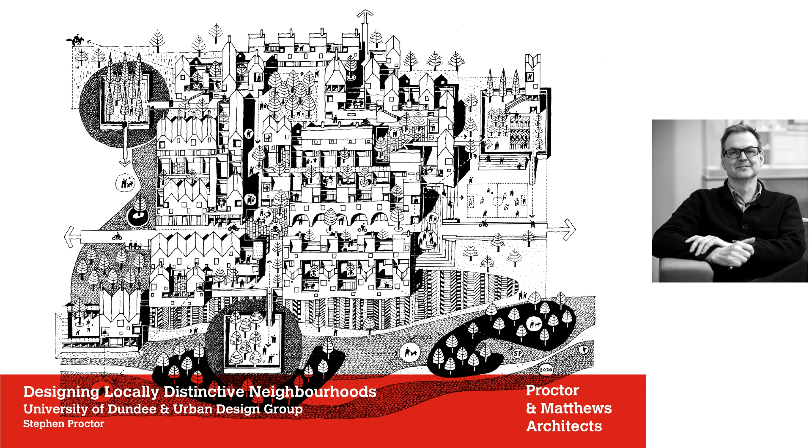I can't forward the slide.

And that got me thinking about what it is we do to actually make people really appreciate the communities that they live in, and how they feel that there is a strong identity and a sense of belonging. And a lot of the research that went into that particular project, which I'm going to talk about in a little while, Abode at Great Kneighton, is embodied in some of these documents that we published as a studio over the last few years, exploring a lot of the things I want to talk about today. And those can all be accessed on the Proctor Matthews website there.

So as a starting point, I think it was useful to go back to these two quotes. One from Gordon Cullen in '74, that he wrote as part of a study for a new settlement to the south of Aberdeen called Maryculter. And he said there that people live in houses, but where do houses live? If they are homeless, then all we are left with is the typical endless, featureless suburbia.

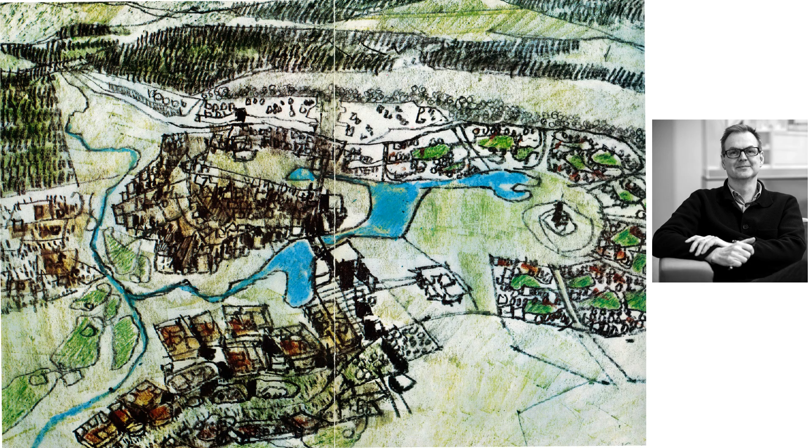And I suppose that leads on to this idea of security and enclosure and safety. It leads on to this idea of the boundaries of settlements. And to us, boundaries of settlements are one of the key ways in which we can define identity. And that doesn't necessarily mean separate settlements sitting in open green fields. It could also be the idea of different quarters within a city, how you cross a threshold, a boundary into a new quarter, so that identity is expressed in that way.

And this quote from Hisham Matar, the Pulitzer Prize-winning author, about Siena, is really important, I think. This idea that walls aren't just protective, they actually help us to define what we are ourselves. They define a territory. And that to us leads on to this idea that edges, boundaries, and thresholds are probably one of the first narratives that we always investigate when we're trying to create new neighbourhoods.

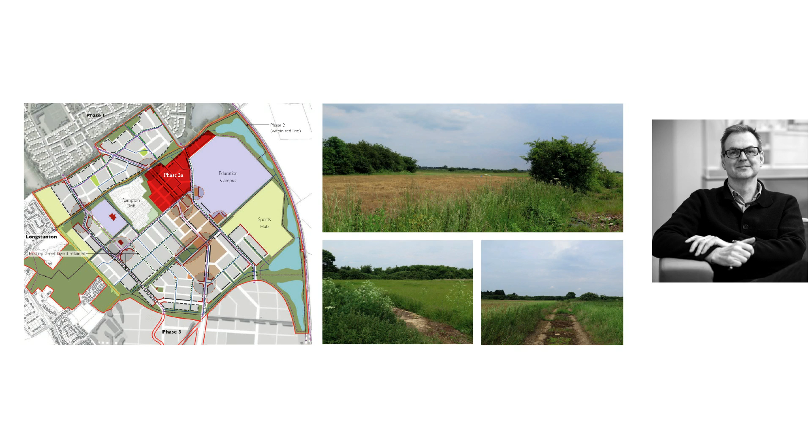So I wanted to start by talking about a project we just finished for Homes England in Northstowe. It's to the north of Cambridge. I think eventually this will be a new town of about 10,000 new homes. And we were looking at the first phase, really, of just over 440 new homes.

One of the key considerations here, as you can see on this slide, is that it's surrounded really by landscape on most of its sides. This is an education campus here, so this is buildings sitting in landscape, and then above on the edge here and on this northern edge. And so we started to think, well, what would it be like living in this first phase in this landscape? How do you create that sense of identity?

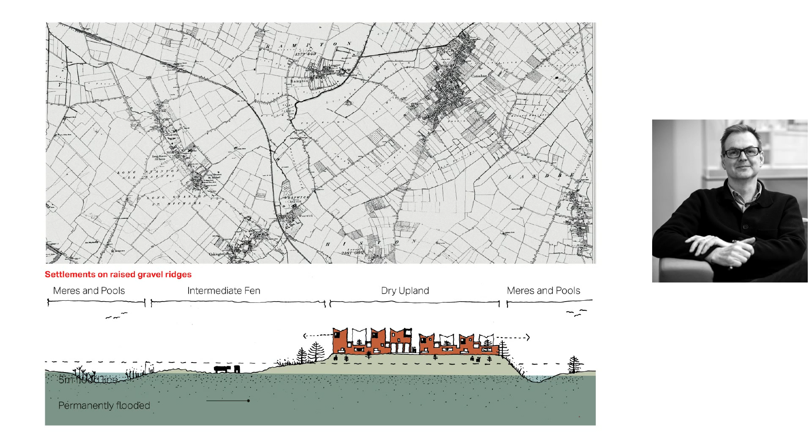And so we started to think about other fenland settlements here, and this is really, it's not very clear, this slide, but all those settlements within those sort of field patterns were originally settlements within marshland. And the little cartoon at the bottom suggests that all those were on high gravel beds that just were above the floodplain. And so they were very clearly defined settlements.

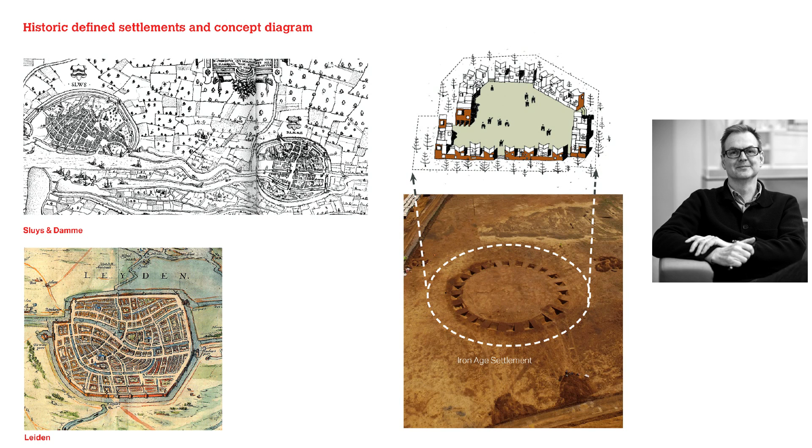or within a sort of marshland landscape. And so there are a lot of the historic plans there of the Low Countries and those defined settlements, defensive in this case, but settlements sitting within a wider landscape. And the cartoon on the right was the beginning of our suggestion that maybe our proposal for Northstowe should be a defined edge, something with a very strong edge, where you step into the realm of the neighbourhood and step out into this wild landscape.

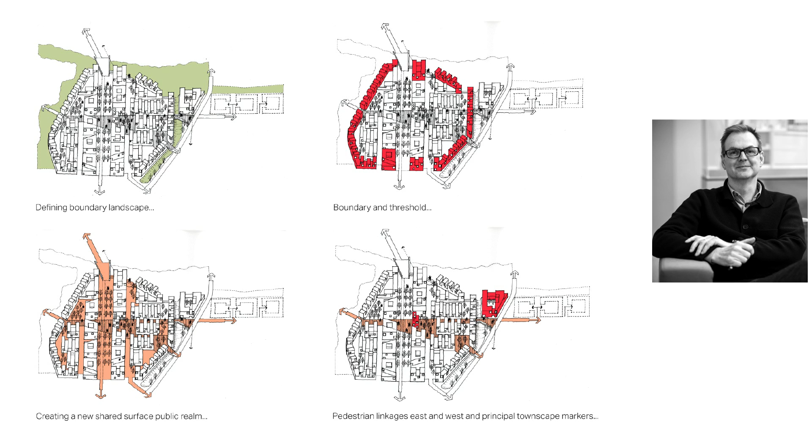And a few more diagrams there of how that strong edge maybe defines the patterns of landscape within those edges. And eventually a little cartoon. And then, of course, it became a real project. Unfortunately, it's not gone the best of ways. We built part of it, and then we had a developer that went into liquidation, I'm afraid. But so we built part of this.

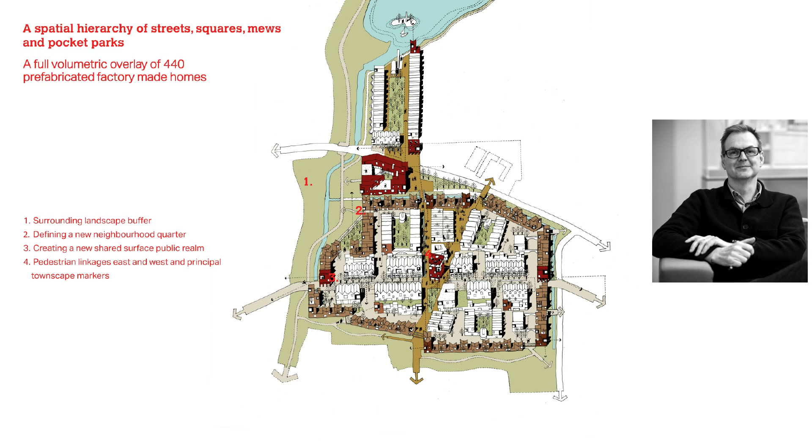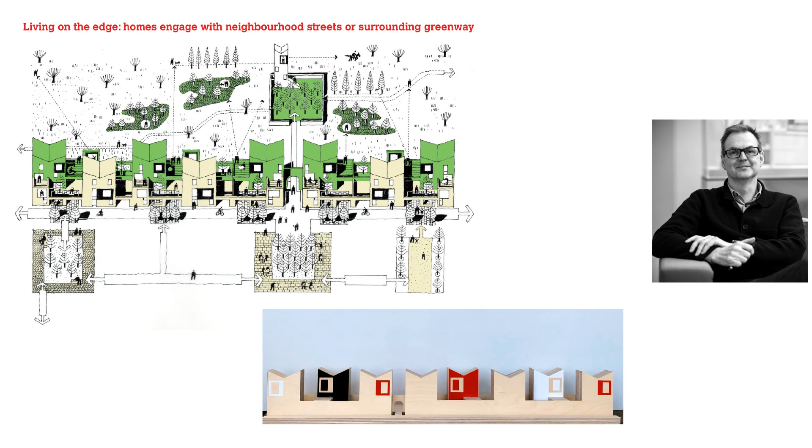Either you sit within the settlement, these houses here, and you face into the inner world of the settlement, or the greenhouses on the edge. So you're either an introvert or an extrovert. And just to show that these were thought through in terms of their planning and how each house typology helped to create that strong defined edge. And there we have the final proposal.

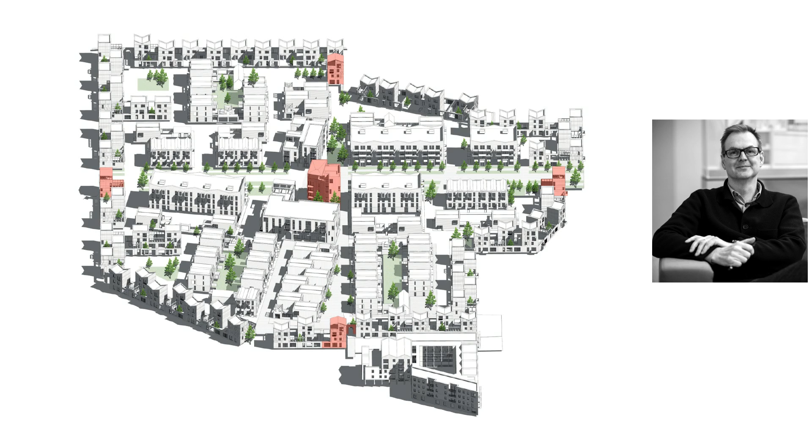The next project is a more recent project. It's for an estate. It's a historic estate that was built in the 19th century by an industrialist called Corbett, and he engaged a French architect to design this little chateau for his future wife. It's in the sort of Louis XIII style, and it has a very sort of formal relationship to the sort of parterre of gardens, these raised terraces in front of the house, and then this designed landscape around it.

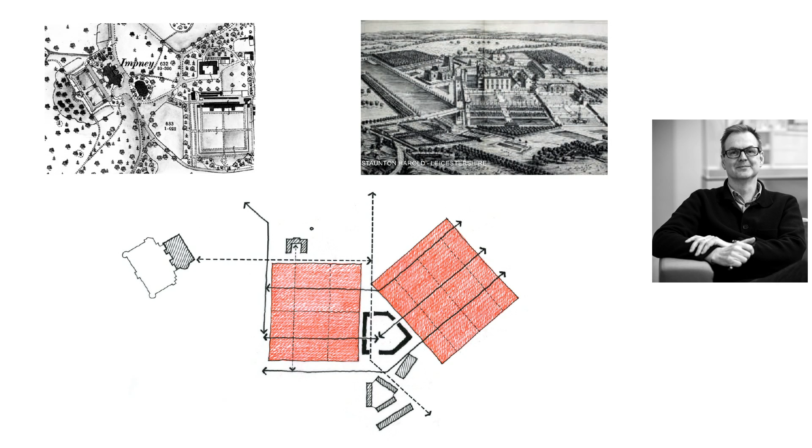But you can see on the right-hand side of that image, there are some buildings that have appeared in the 1970s and 80s. It's a conference centre that's now disused. And it was built on the site of a walled garden. You can just about see the footprint and these wonderful Wellingtonia trees. So our commission really was to design a small village in the grounds of the chateau. The chateau is here,

and our starting point was trying to look back at the form of the walled garden in the landscape. So this part of the new neighbourhood, new village, became quite a sort of formal collection of buildings sitting within the walls of the old garden. And then the rest of the village moves off into the landscape in a different geometry.

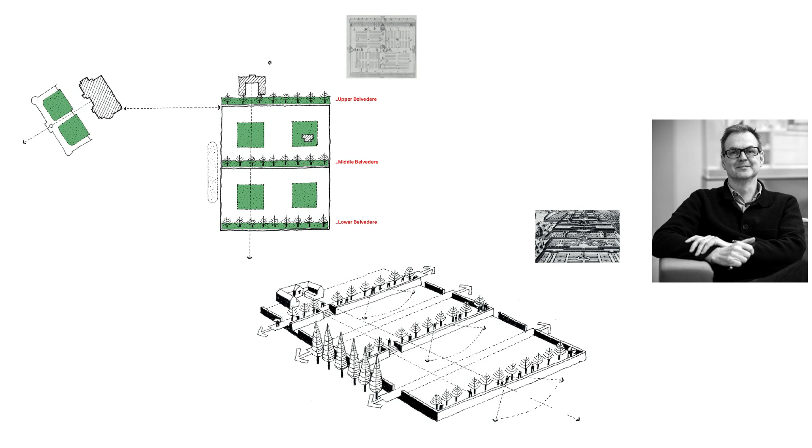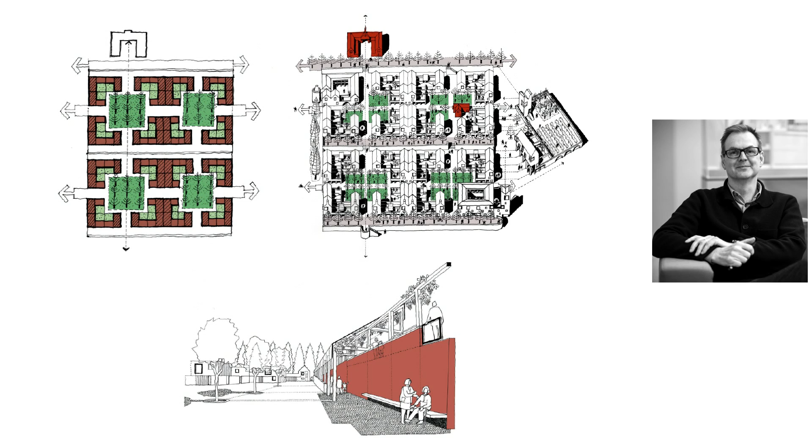So just going back to that walled garden, we were looking at the references to sort of French chateaux and the parterre gardens, and this idea of a structured, very formal arrangement, and these little cartoons showing how that could develop, and that developed a little bit further, a little bit more density here, but still with the idea of formal gardens sitting within this section of the new village, and a ramp that took you up through one of those sort of belvedere edges, these sort of promenades that cross the different parterres.

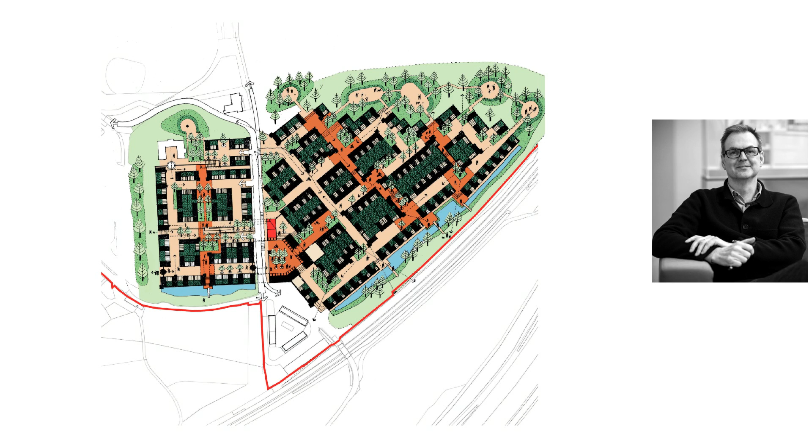And then this was the early drawing of the remainder of the village. So you've got the walled garden here, and then the village going off into the landscape, the railway and motorway along this edge. Bear in mind, this part of the site is actually in green belt, and so it's a very sensitive planning negotiation, really, about the replacement. If we could repair the setting of the original chateau, could we actually increase the biodiversity within this part of the site by building on it?

The quality of this on this screen is really bad. I hope online it's better.

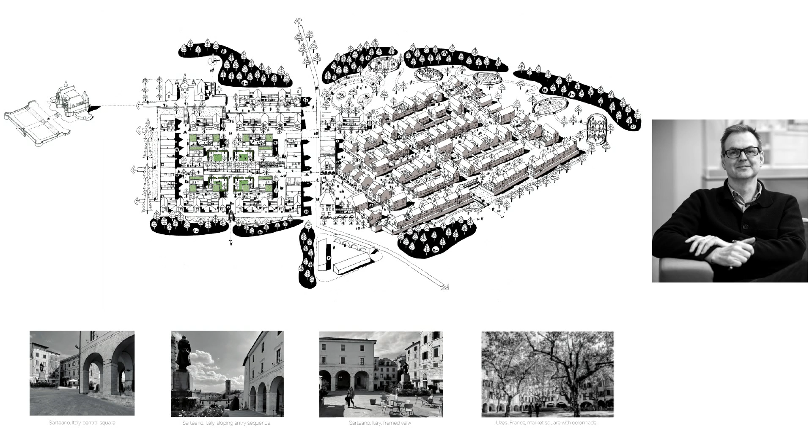So the principal idea, of course, is that where the grids twist between the formality of the walled garden and the slightly more relaxed nature of the eastern field, we actually get the focus to the neighbourhood along an existing bridleway. There's the final plan of that.

So the second narrative I wanted to talk about really was this response to landscape. And landscape is something that is often ignored, particularly in suburban developments. It's a game of numbers often. But the topography and landscape should be the drivers of narratives about anchoring a new settlement in place.

And these are images from a study we did for St Albans and Dacorum councils. It's for a supplementary planning guidance. We did this alongside David Lock Associates. And it was really a provocation, I suppose, to developers to say, look, there is a form of development that is made in response to topography.

And we cited various existing examples within Hertfordshire of how topography and landscape had directly impacted on the grain and the scale and formation of the new settlements. And if you look at all the place names, places that end in worth or hoe or ham or green, they relate to a section across a valley.

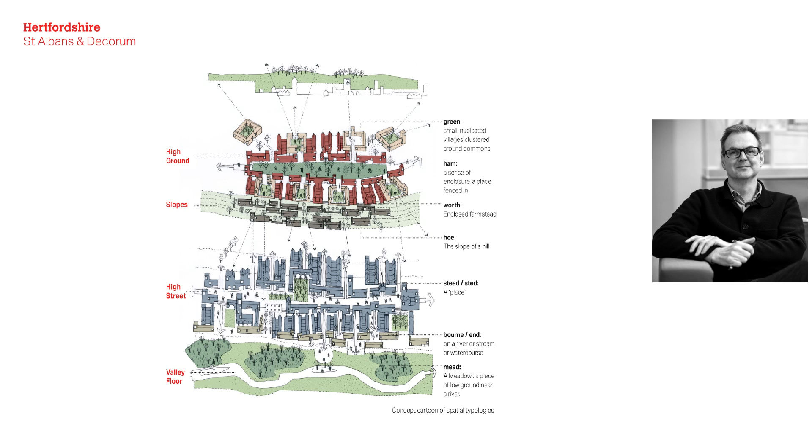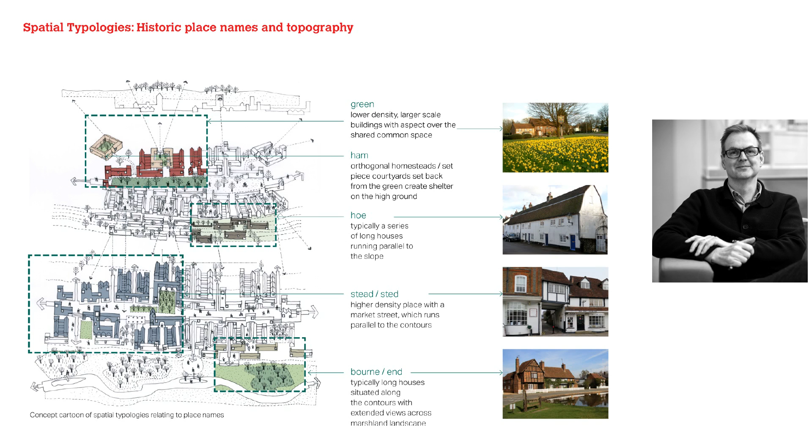So this cartoon was really to demonstrate that, and then we showed examples of where you could find this across Hertfordshire. More examples here.

And then the idea was to make propositions that if the developer came with a particular site that was located somewhere along a valley section, there was a way in which the built form could be arranged on that site which related back to those historical forms.

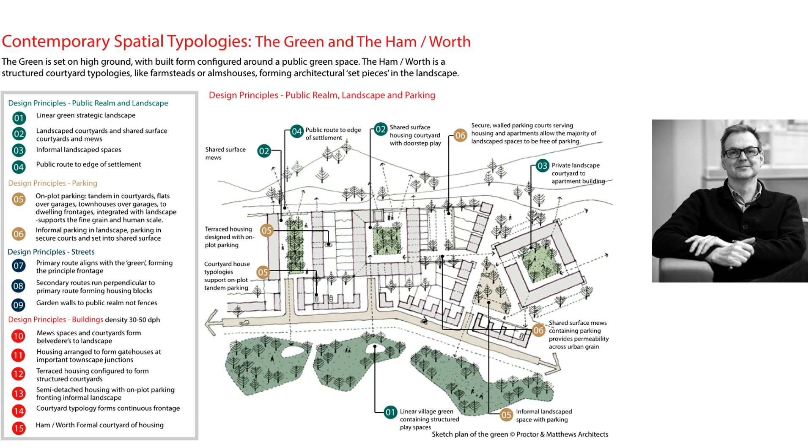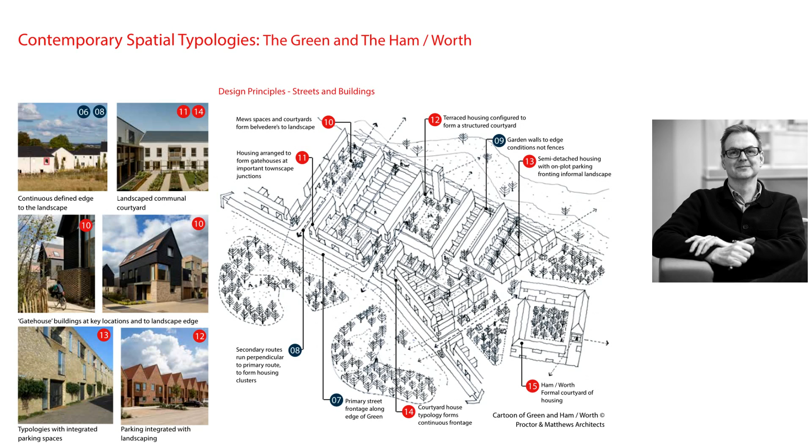And so these are a series of cartoons. They're speculations again, because they're increased density, but they build on those historical settlements. This one's for the stead. And there we go, we got again a three-dimensional view of how that might be arranged.

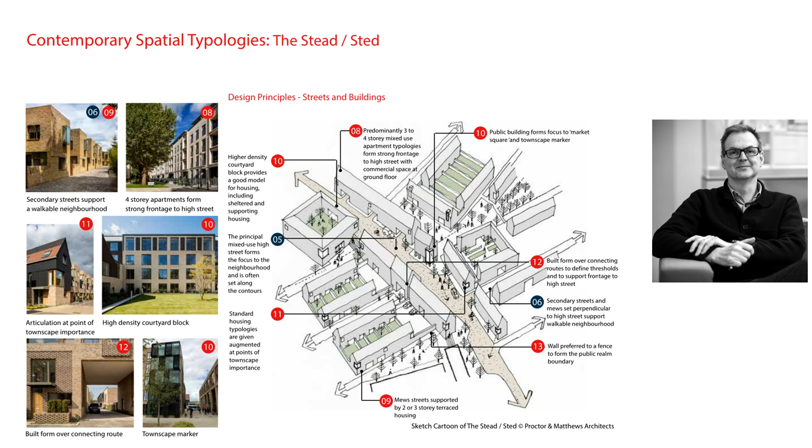So the third project is another project we did with David Lock Associates. This was for the southern expansion of Canterbury, in a place called Mountfield Park. Again, it was designated for housing, and we got outline planning permission for, I think, about 4,500 new homes.

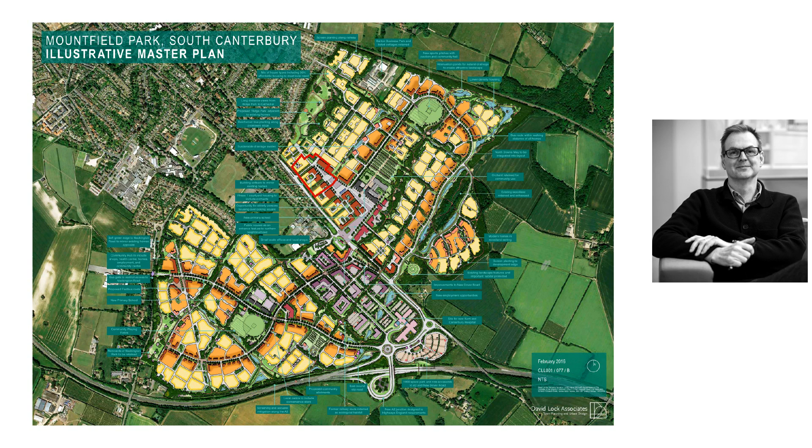But our contribution to this was to look at one particular piece in detail to demonstrate that you could actually make something, again, that was very local and of this landscape to set the scene for this future development. So the first starting point, and these images are very faint, but the red ring shows the Bell Harry, the tower at Canterbury Cathedral, viewed from the site.

So as you can imagine, this is to the south of Canterbury. This is on the Pilgrims Way, so it's adjacent to a World Heritage Site, a very sensitive location. And I think often the idea, when you look at landscape, is that landscape is all soft and sinuous, the country lanes that meander across the landscape.

But of course, the reality is this is the Kent landscape. These are hop fields and orchards and shelter belts, and it's a gridded orthogonal landscape. And when we started to look closer at our own site here, on the main Dover Road going into Canterbury from the south, you see there are these vestiges of these shelter belts and orchards and hop fields.

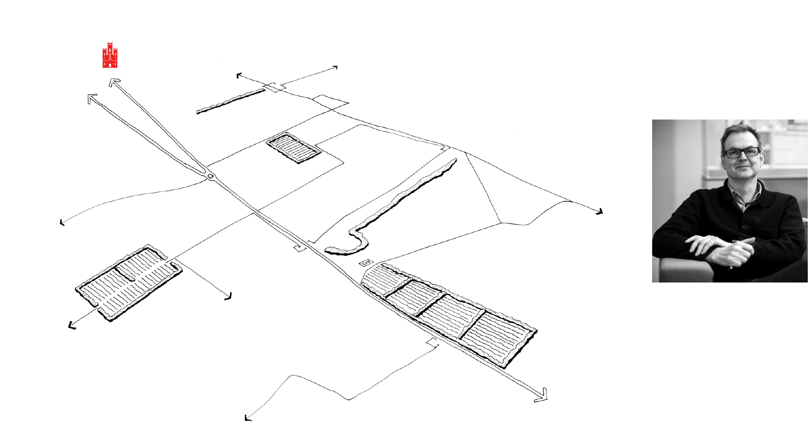And so the proposition was that, almost like Cullen's Maryculter study, we take that landscape model as a way of defining new settlement clusters. And so this is one of those structured clusters of homes. Instead of the conventional cul-de-sac arrangement, these are clusters divided by productive landscapes, orchards preferably, because it's Kent, and each of the houses around the cluster have a dialogue.

And we like this image because this is from an early publication of the Canterbury Tales, and these are all the characters in discourse around the feast, and of course our feast is the orchard in the middle, but each of the characters are the houses around the cluster.

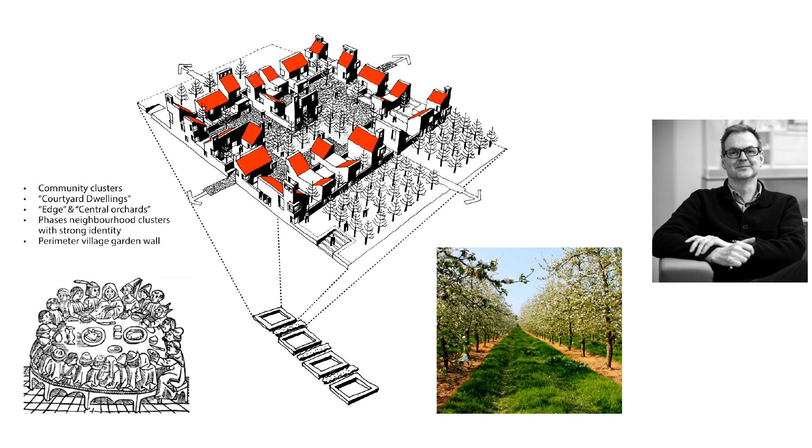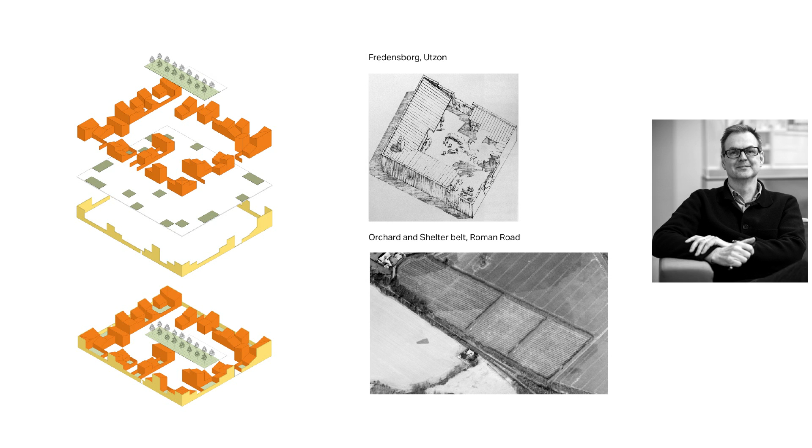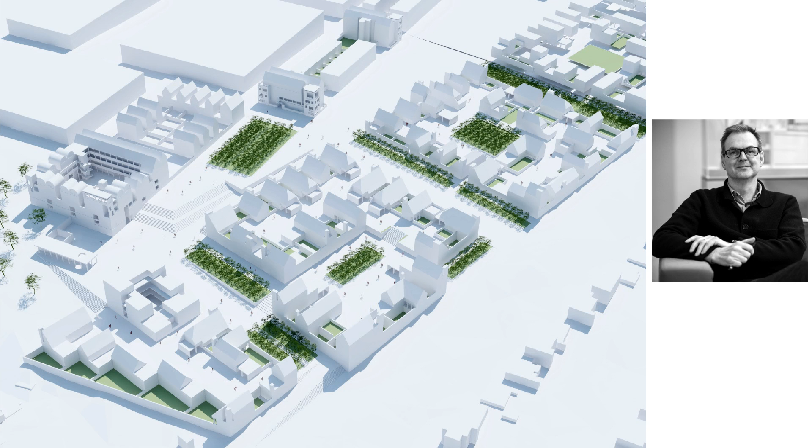And then we looked at a little bit more detail. So we were looking at Utzon's work in Denmark, and the way in which courtyard housing is a way to define an edge of each of the clusters. More of those, the way those clusters appear, and then the final proposition.

So I think what was interesting about this was it was a different way of laying out housing. There were 140 homes on this first phase, and the suggestion was that in clustering them this way, it actually made this idea of identity very immediate. So if the developer built this cluster first, it would have its own identity, and the identity of this one would be different from this, would be different from this cluster, etc.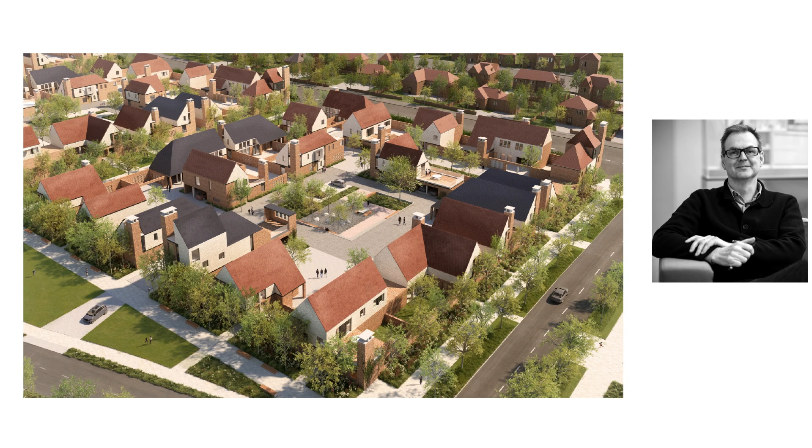Which means phasing is easier. You're not living on a building site all the time when a new neighbourhood is expanding. But each one has its own focal space for the residents who live around it. And these are some of the drawings for that. And then finally, that orthogonal landscape of the shelter belts becomes the orthogonal landscape of these clusters, which actually align the main focal street of the new neighbourhood onto Bell Harry in the distance there.

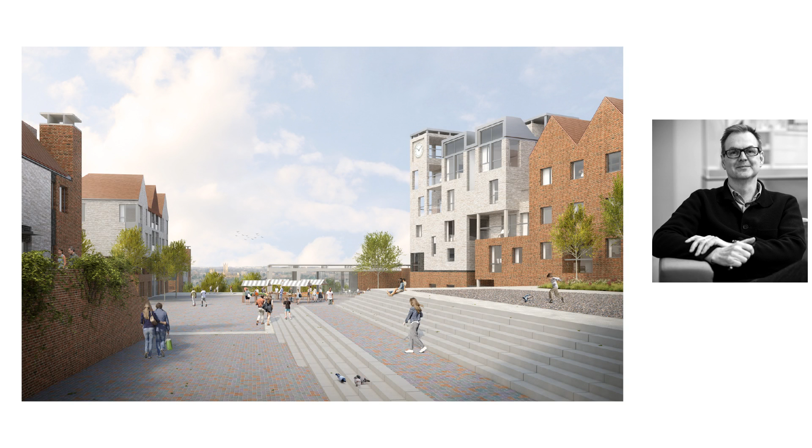So another project that's related very much, a very different kind of project, much more sort of inner city dense project, but still related to landscape, is the work we've just been doing at Riverside, Sunderland, which we've been working on alongside Kevin Murray, who's here today, and Faulkner Brown and Mawson Kerr, who are architects in Newcastle.

And I think the interesting thing for us here was that the whole city of Sunderland had really turned its back in the post-industrial era away from the River Wear. So we've got this amazing gorge running through the city, but everything was turning its back on this landscape. Originally, of course, it was an industrial landscape, a very famous industrial landscape. Some of the early railways brought coal to drop onto barges in the coal drops along this landscape.

So here we've got the idea of placing this topography, really, the centre of the city within a wider context. So it's very pivotal, this particular site on the top of this 30-metre gorge down to the River Wear. And the yellow there is this dramatic change of topography. And then this particular valley here, Galley's Gill, as this is called, is where the railways came down and dropped coal onto barges into the river.

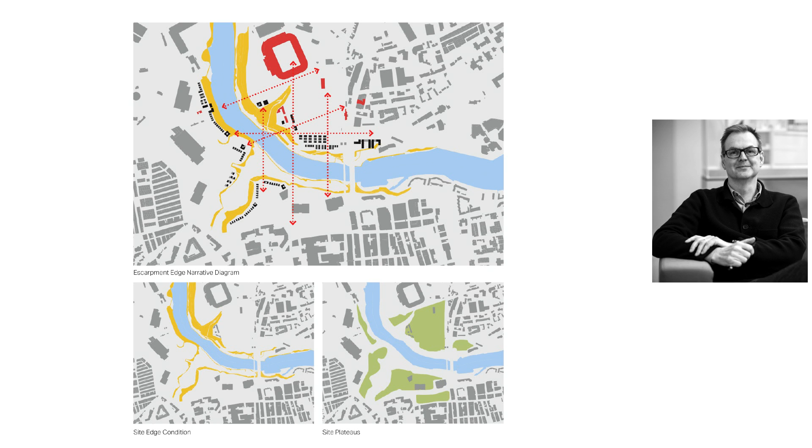So one of the interesting things for us was the textural qualities of the built form around the site, very distinctive. We talked about boundaries earlier. These have their own very distinct boundaries. This is the city centre. But the project was to try to encourage people to live back in the city, and to also expand the business district of the city.

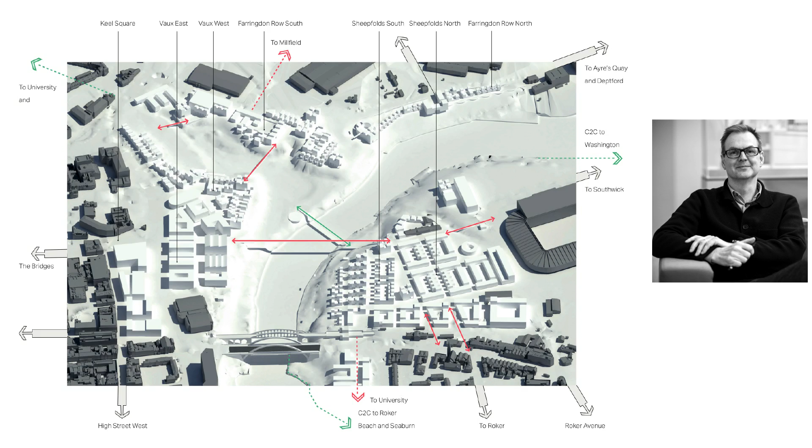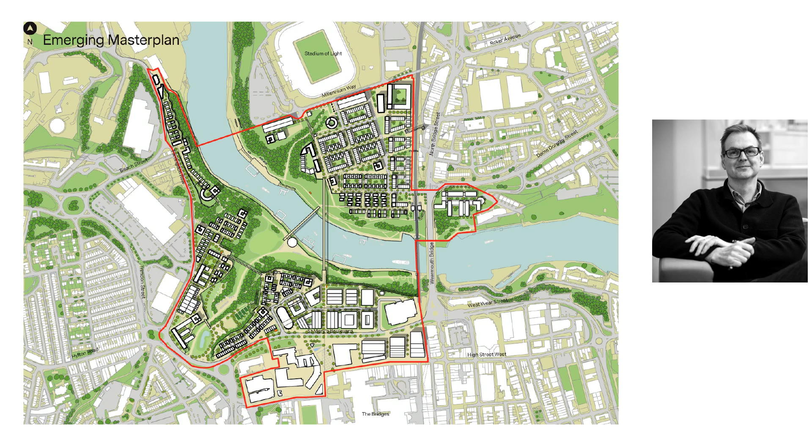So there you can see that idea of the grain and how each neighbourhood, and I think there are 5 distinct neighbourhoods here, begin to express themselves. So picking up on that first narrative, you've got the boundaries to each one, very defined by the landscape. But I think that one of the key items of this study was really to look at the idea of silhouette and the profile of the city.

And this was a fantastic opportunity to recreate what had originally been in the industrial area, this fantastic dramatic silhouette of chimneys and kilns and industrial activity. And could we put back a 21st century silhouette to the city that was worthy of this setting across the gorge? You can see that change in level, that 30-metre drop across the edge of the city.

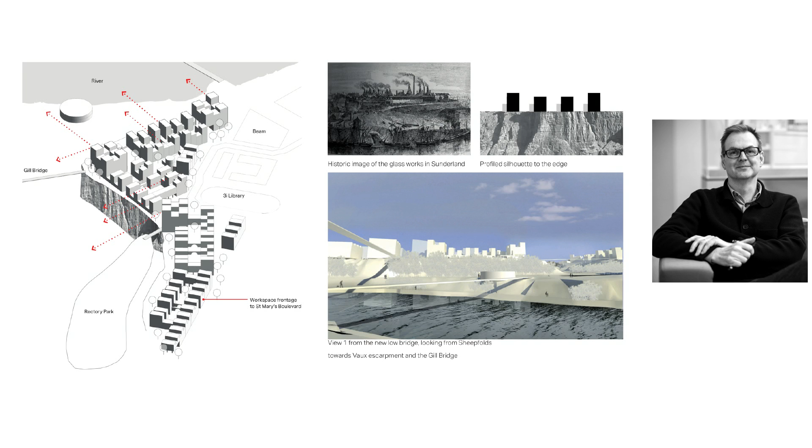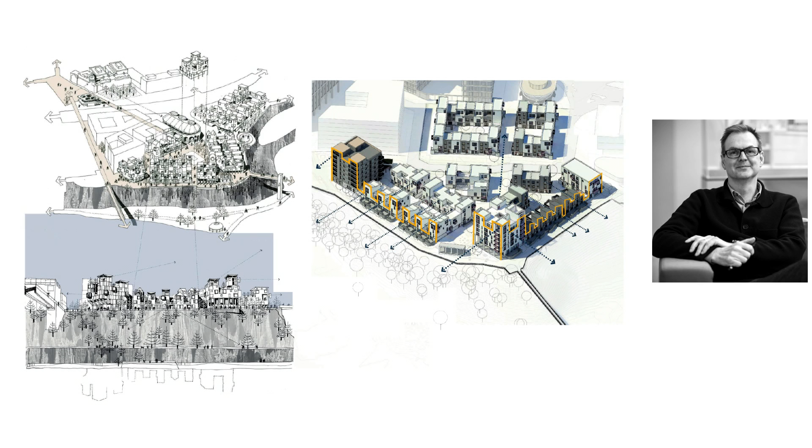So these are various studies of those. It's terrible resolution, but these are studies of looking at a silhouette, a sawtooth silhouette, which I suppose came from this sort of architectural toy here that sits in our studio, of arranging different cutouts of silhouettes so you can create new, very distinct streetscapes as you look into these slices through the different profiles. And so hopefully that's coming through on that top image, where in the distance you can see a different profile to the one on the city edge.

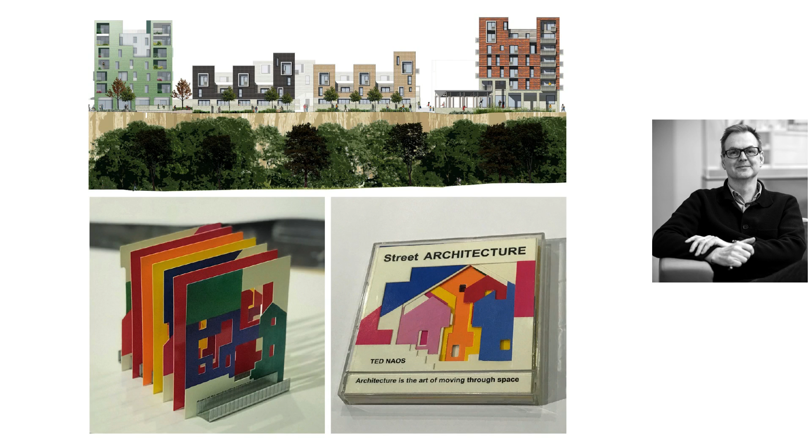And the first phase of that project is on the site of an old brewery, the old Vaux brewery, which sits on the edge of the escarpment.

And 5 minutes, okay.

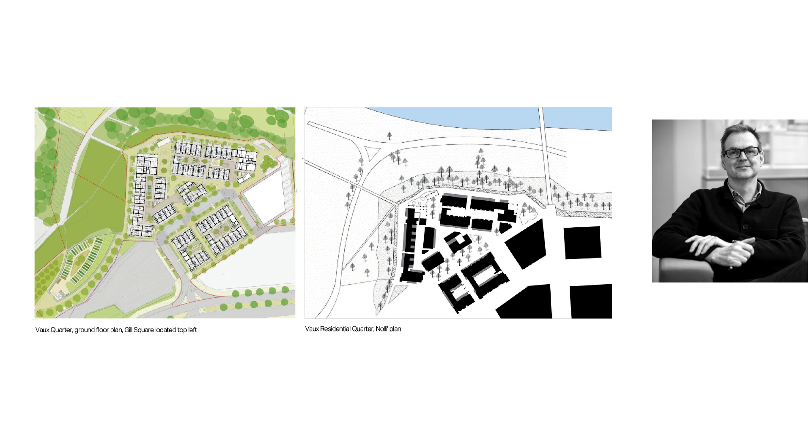And one of the ideas of making something distinctive is also a response to the climate. And although this is a very dramatic site, it has an amazing exposure to the elements on that exposed promontory. And so, although there are promenades along that edge, there are also these quiet community mews spaces which exist to make living on the edge a plausible proposition.

I may skip through this, but this is really to do with looking at local building types and how we can translate those to meet 21st century living patterns. So we're referring to the very distinctive Sunderland yard house, the Wearside maisonette, and then pele houses, which are these sort of defensive buildings that appeared within the borders country between England and Scotland. And they make fantastic models because they're courtyards in the middle for the idea of apartment living.

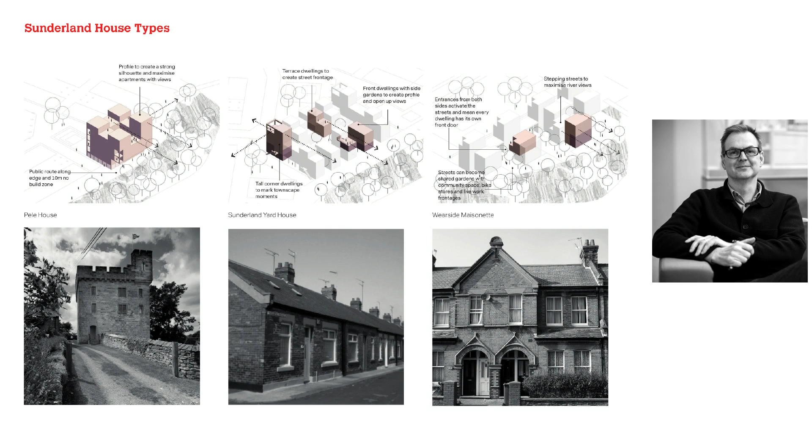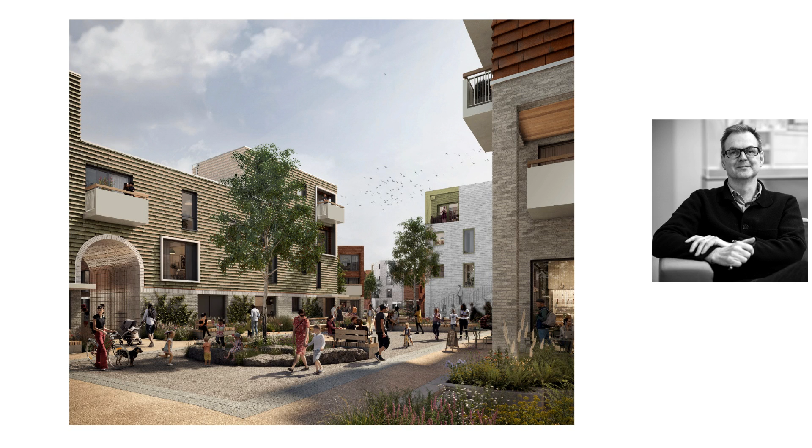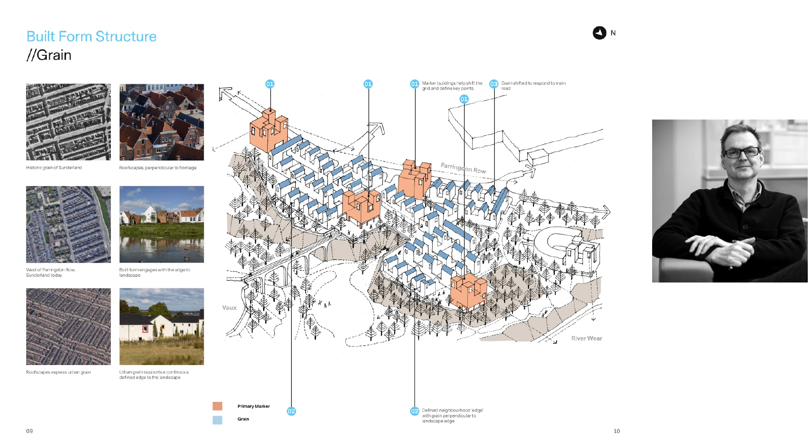So some of the views of that. And that's one of those mews spaces. This is currently on site, though we're having a little bit of a problem with a contractor at the moment. And then for the remainder of this side of the river, we did a design code, which again looked at grain here, how grain can make a distinctive neighbourhood. And then, of course, how we can create that silhouette. And then that's the overall impression.

So I'll quickly go into these. So this is about settlement patterns, grain and texture. So the work we've been doing in Ireland that Hussam alluded to earlier is really about looking at a new model for medium density, low-rise family housing. They have a problem in Ireland in terms of making an affordable product that could deliver over 35 dwellings per hectare, 40 dwellings per hectare if possible, but without apartments because there's no market for apartments.

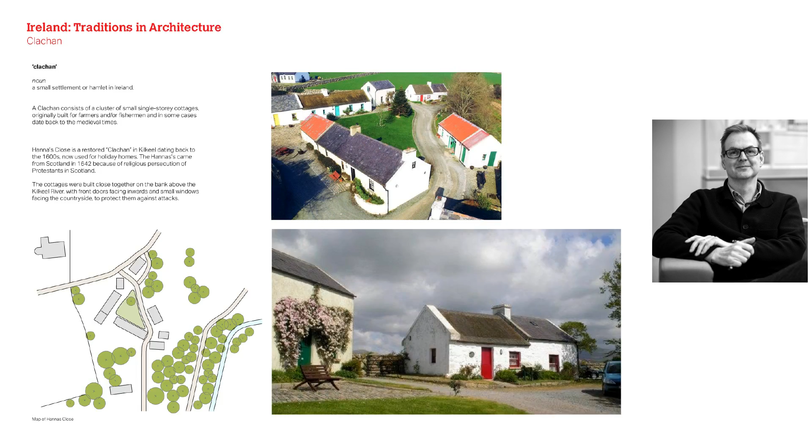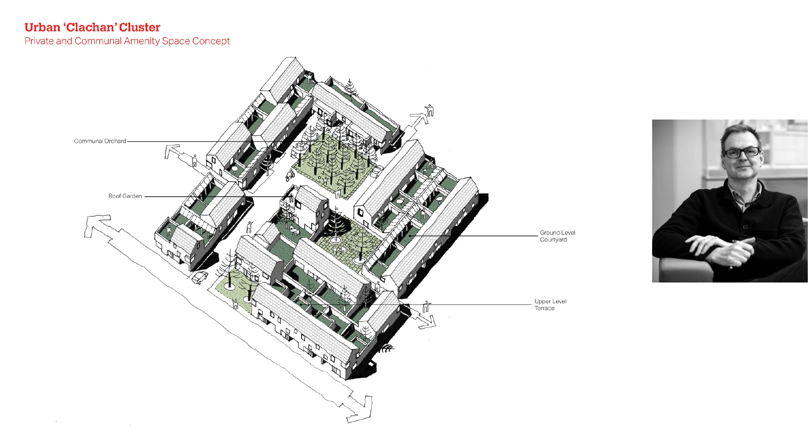And so we started to look at those traditional forms. This is a clachan, a rural cluster of homes around a communal yard or green in this particular case. And so our first proposition was that we should be designing house types which can be arranged in many different ways to create clusters of homes around communal space with private courtyard gardens. So you've got a much greater intensity.

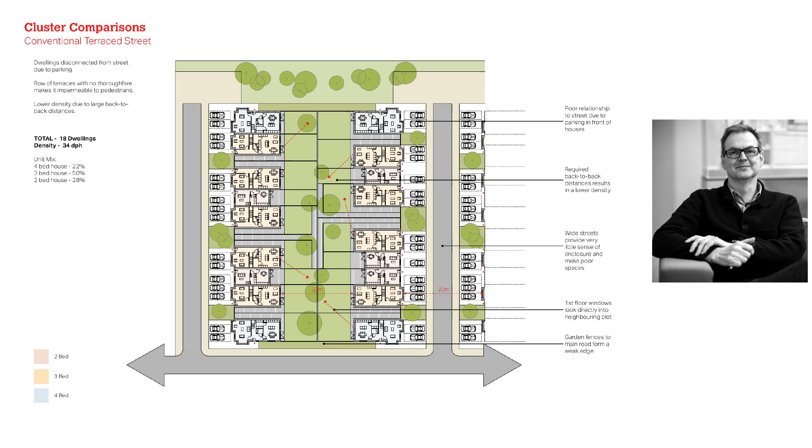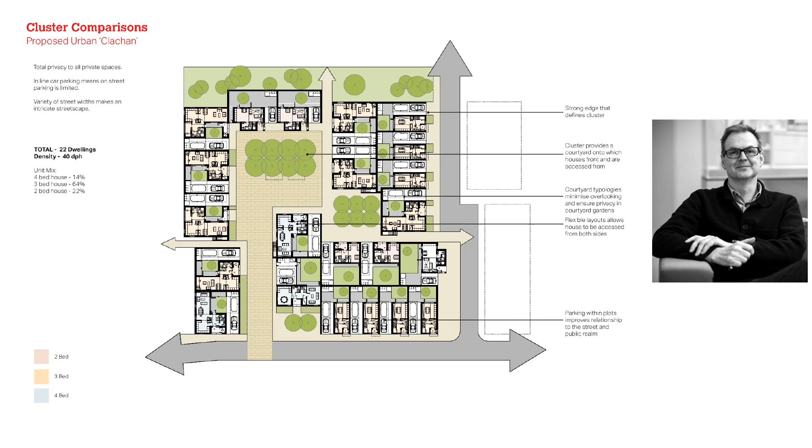So our proposition was that you arrange these in a different way. You get a greater density. You've got 40 dwellings per hectare here, and if you looked back there, 34 dwellings per hectare in the traditional model. But you actually get a much greater sense of spaces where people can interact with their neighbours. And I think that's, again, about creating identity. And I'm sure that Stephen Willisey will talk a little bit more about this later. And so the house types begin to build a different way of assembling housing clusters.

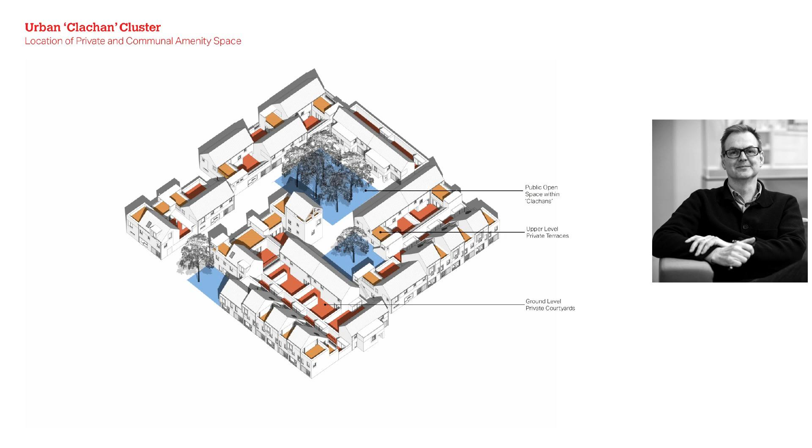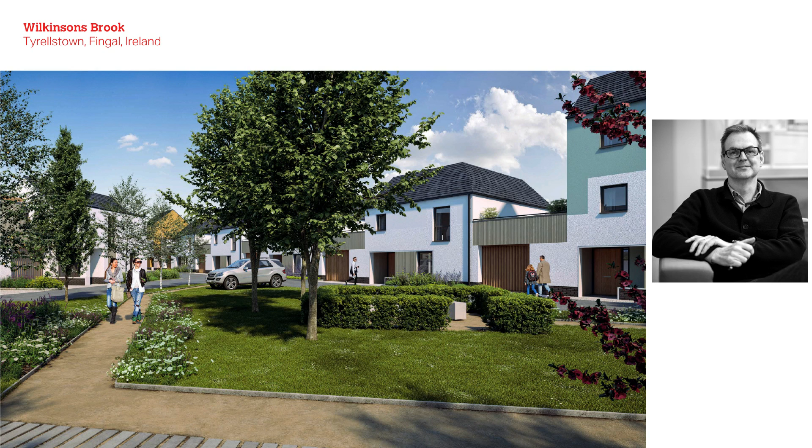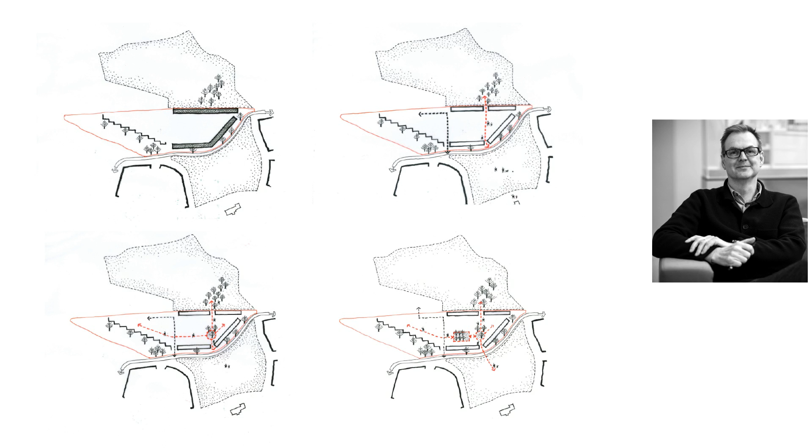And so we're now on site with this particular project. So this is taking those same house types, but clustering them in a very different way. So this is at Wilkinsons Brook, Tyrellstown, a suburb on the edge of Dublin, on the site of a disused golf course. So an amazing landscape to the north, and an open sort of village green to the south. So these are the house types assembled, and we start to think about a communal clachan in the heart and a public clachan in this location, connecting those two landscapes in the south.

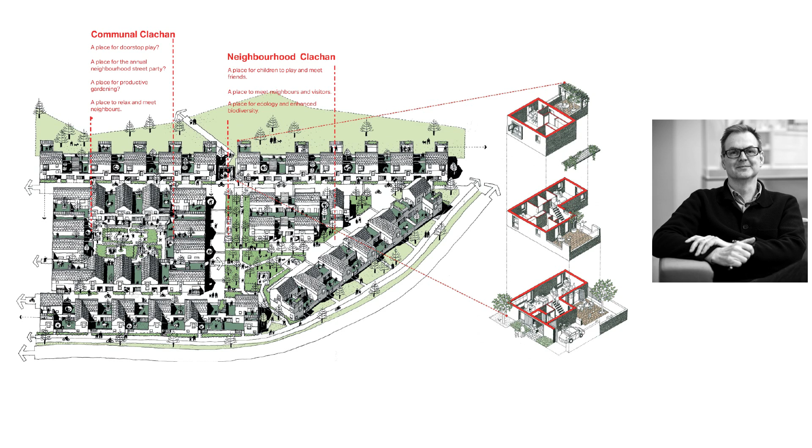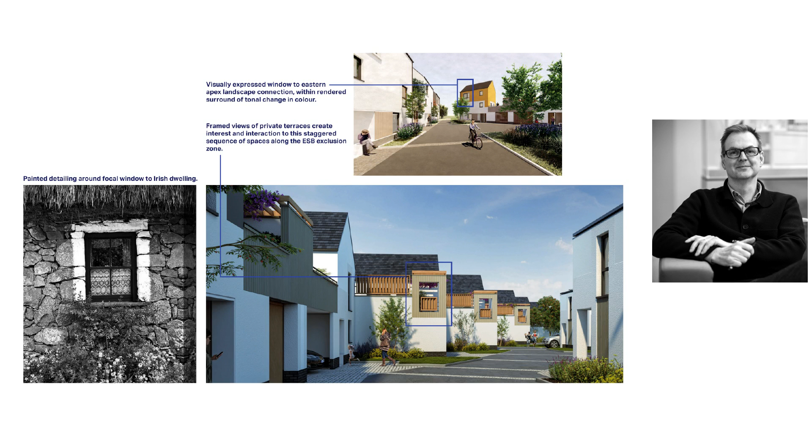And then making reference back to a study of Irish vernacular elements, but done in a very contemporary way. The entrances are becoming very important, as those places to meet your neighbour. I'm going to skip this one completely.

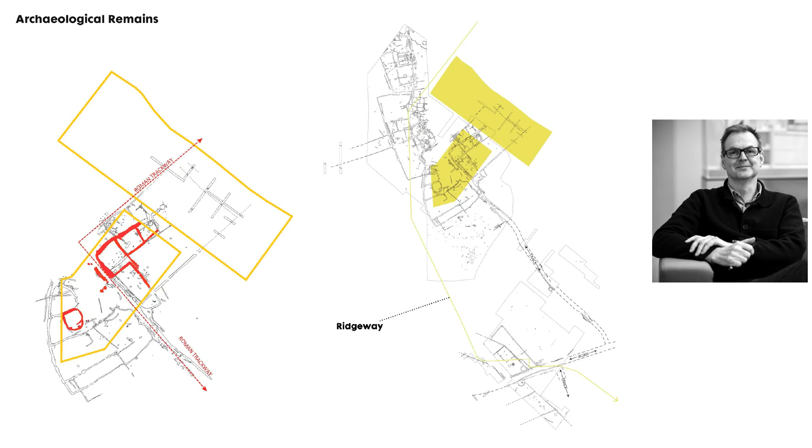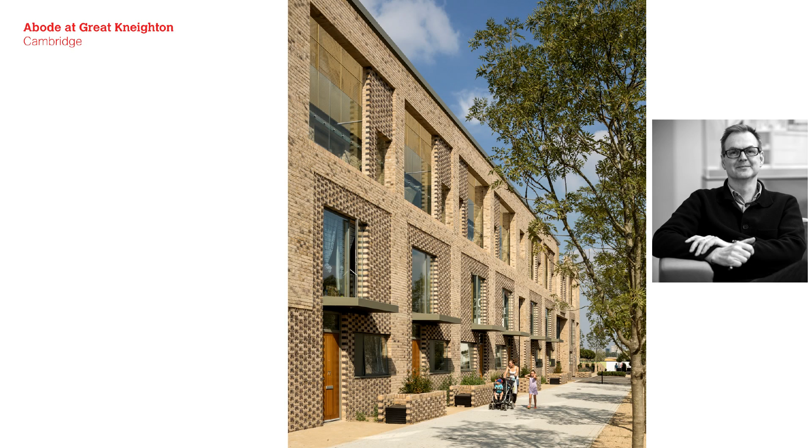Sorry about that. So I'm going to finish really with this project, which is where the talk started, which is Great Kneighton. Great Kneighton is a new development, I suppose it's over 10 years old now, on the southern fringe of Cambridge. And we were asked to do the first phase of the development of about 2,500, 2,700 new homes. Our phase was about 400, I think, 460 homes. And the starting point was really to think, well, the evolution of Cambridge was a series of collegiate and monastic courts.

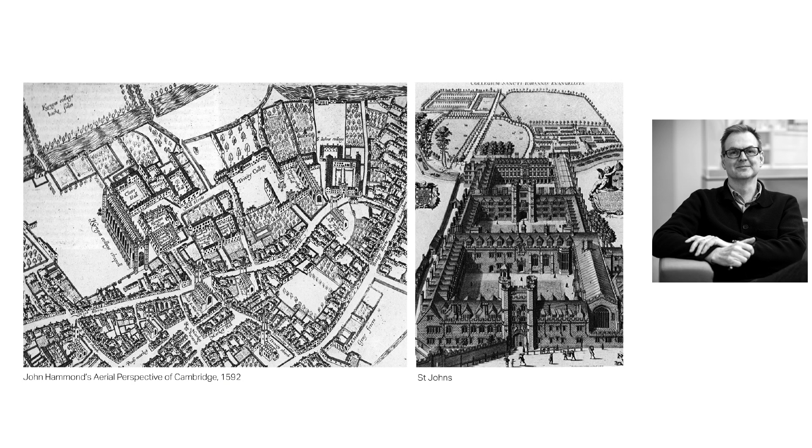It sort of tamed this wild fenland landscape, capturing the landscape and formalising it. And so one of the first things we did was to think about how we could tame a piece of infrastructure, which was the roundabout, taking quite heavy traffic through to Addenbrooke's Medipark at the entrance to the site. And so we overlaid the form of the Great Court of Trinity over that roundabout to see what impact that would have. We weren't thinking that we'd actually be building Trinity Court.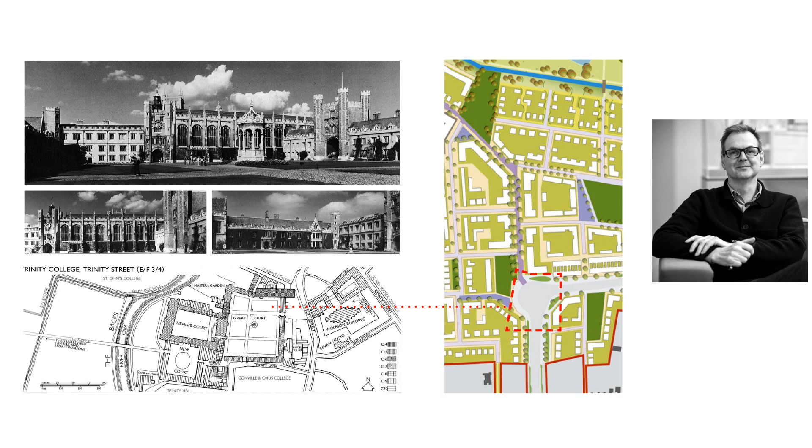Of course, Trinity has this manicured landscape on the inside. This is a different kind of landscape, but it's about the Cambridge evolution of a settlement form. We're also looking at the form of fenland villages and this relationship between the landscape and the high street, and this sort of filigree of fingers of landscape coming into the heart of the neighbourhood, and the built form spreading out into the surrounding agricultural landscape as a series of burgage plots, these long, thin plots of yards. And that has a very distinctive impact on the townscape.

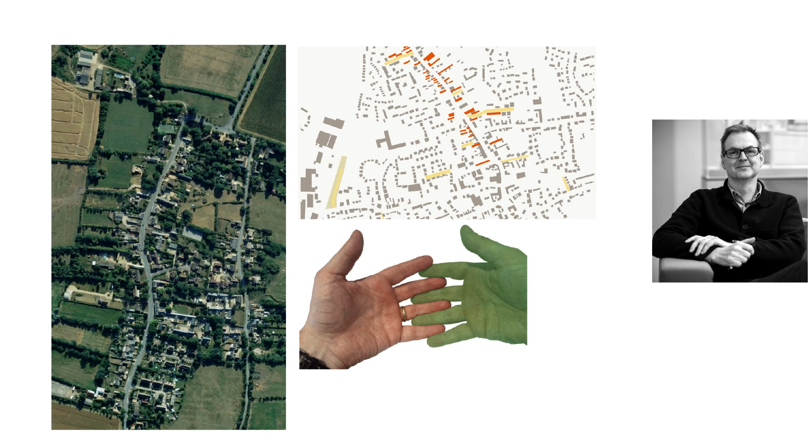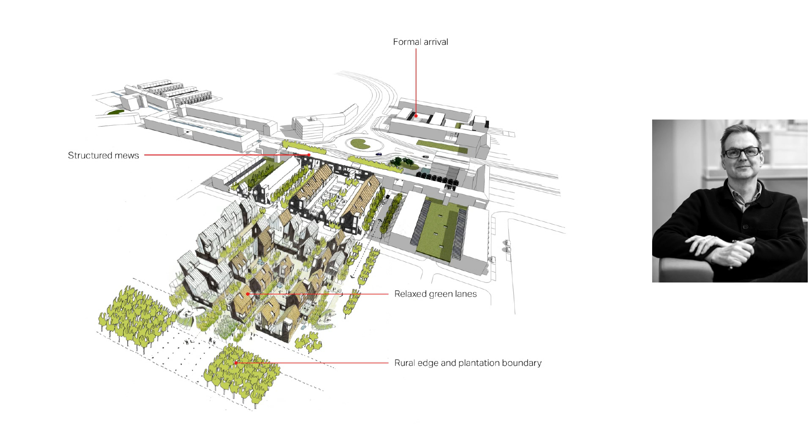So you can see that the drawing on the right there demonstrates there are a series of gables forming the high street, not frontages. And that started to make us think about a way in which we could relate to an existing plantation on the edge of Great Kneighton, and how we could build from our formal court that controlled this arrival space through a series of mews spaces, and then into these fingers of landscape, these green lanes that weave their way from the plantation up into the Great Court where they're formalised.

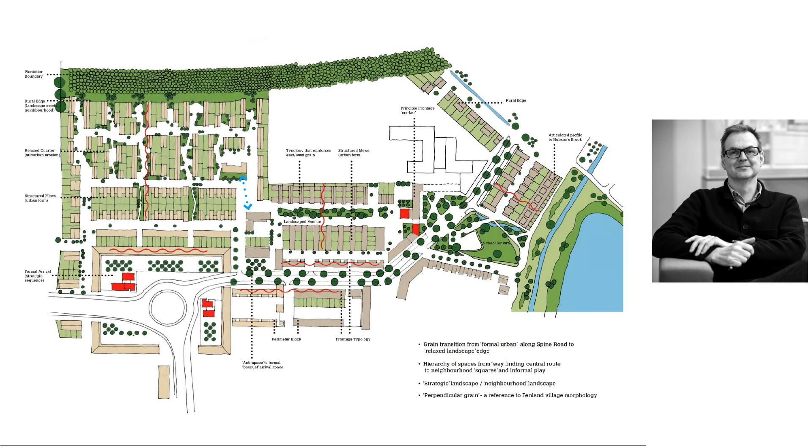And so that's the plan of the neighbourhood. Plantation is here and the Great Court here. So images of the Great Court with the marker buildings sitting within that landscape. And then very distinctive areas within it. The point I'm trying to make here is that you don't need to just change material or change the tiling on the roofs. This is actually about the form of developments. So you get a different grain of development, and that's really what gives it character. The use of materials is then the added bonus, if you like.

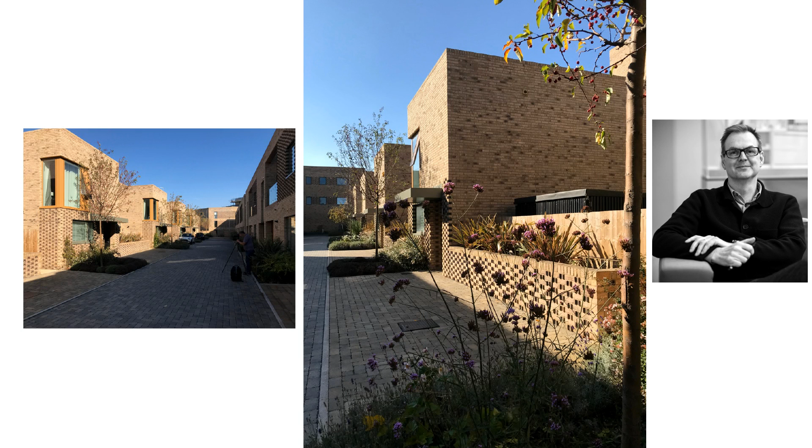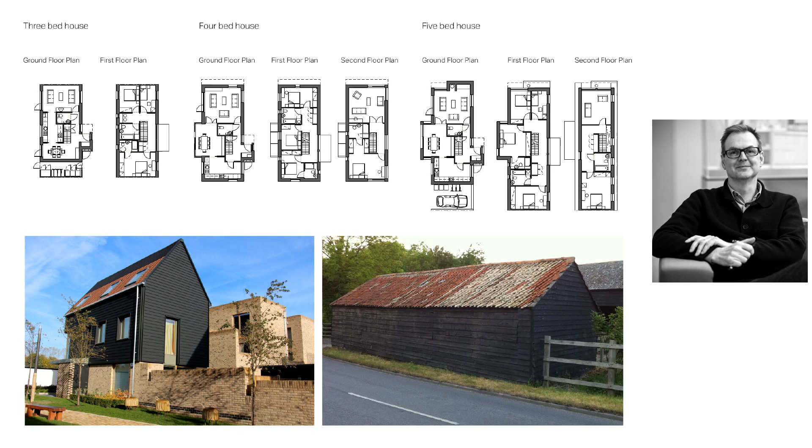So these are some of the mews spaces, and then we based those ribbon developments, those green lane developments, on some of the farm buildings that we see locally. There are very thin buildings with very simple roof forms. And there you see the gables forming the frontage to the streets. So it's not wide frontage houses, these are narrow gables, and they define the street edge.

Have I got time for this or not? 1 minute, okay.

So I know Hassan wanted me to talk about a different kind of demographic, and this is a project for the over 55s, so later living. It's on the edge of Tetbury in the Cotswolds, wonderful little market town. And again, we were looking at historic precedents to give a character to this particular development. If we went back one, you can see these farmsteads within the Cotswold landscape, very structured farms. And you can see one of them here. And so that got us thinking about the form of development for later living.

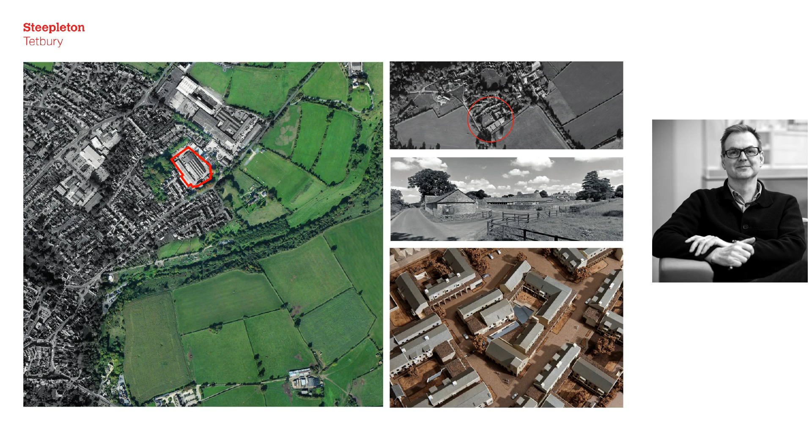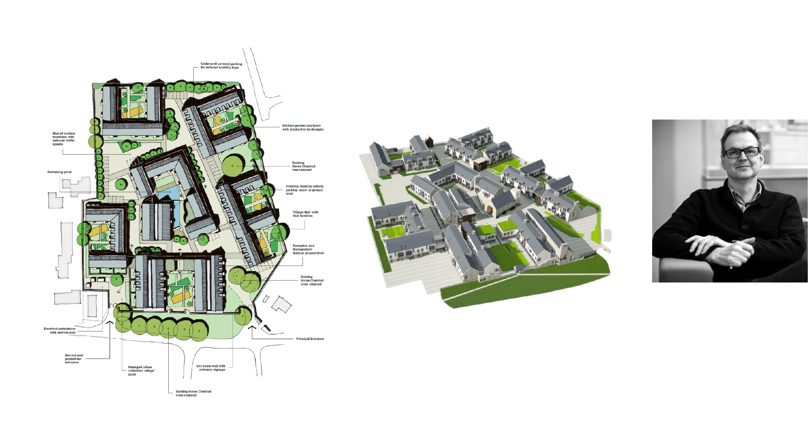And of course, there are references here as well to almshouses. So it's not only local reference to building forms, but also to some extent a generic form. The almshouse court is something that really nurtures a sense of communal living, and that was something we thought was very important for a later living development. So you get a series of clusters of homes all around a court. Each court has a different productive landscape. And the one in the middle has a naturally filtered swimming pond, with a restaurant and spas and gymnasia. And so that becomes the focus to the neighbourhood.

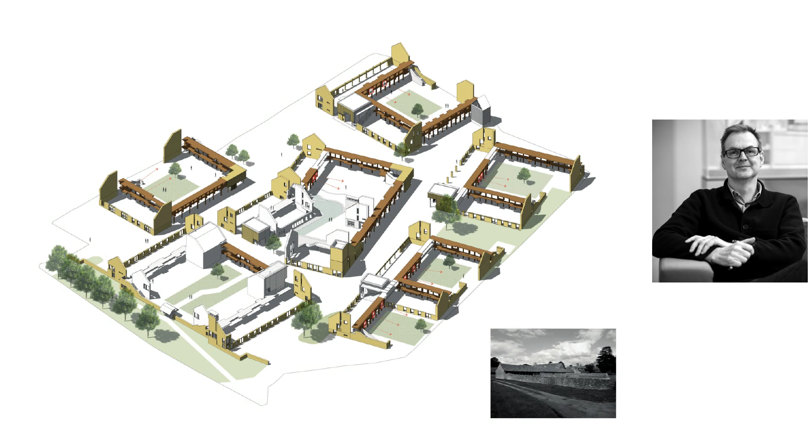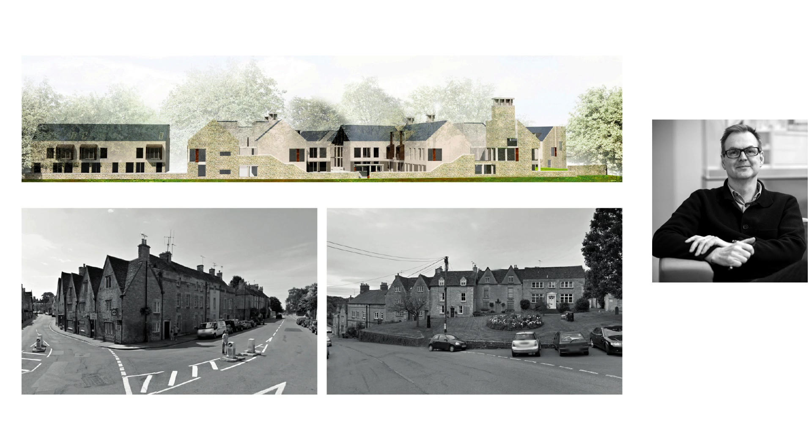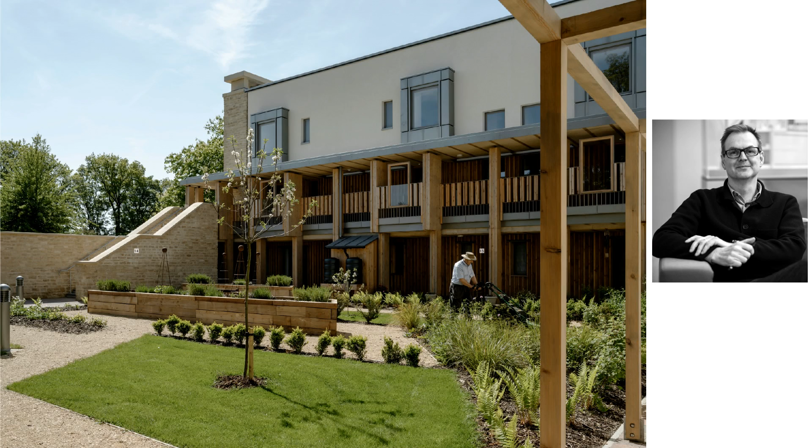But then you can see how the walls and this very simple structure of those farm buildings has begun to inform the architecture here. So you've got a series of Cotswold stone walls, cloistered walkways on two levels that define the courtyards. References to the local vernacular: this twin gable motif appears in the centre of Tetbury, and we're developing the same thing but in a contemporary way at Steepleton. And here are the gables. One of those cloistered walkways, and the textures of the local materials, of course, really help carry that through.

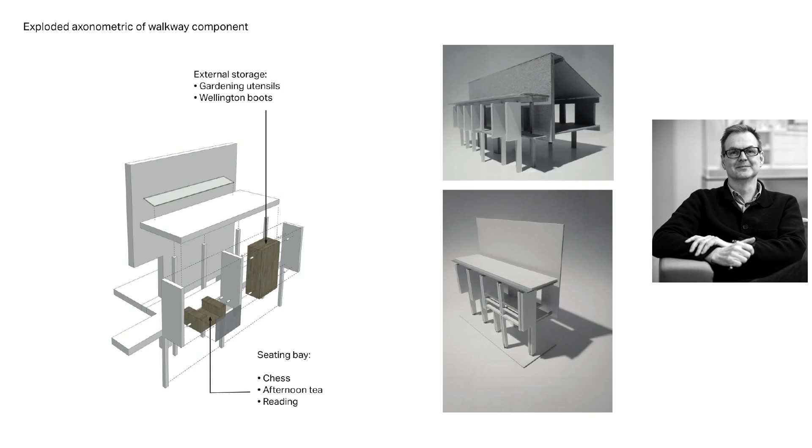And I think that's probably where we should end, and let Stephen Willisey talk now. There you go. Thank you.